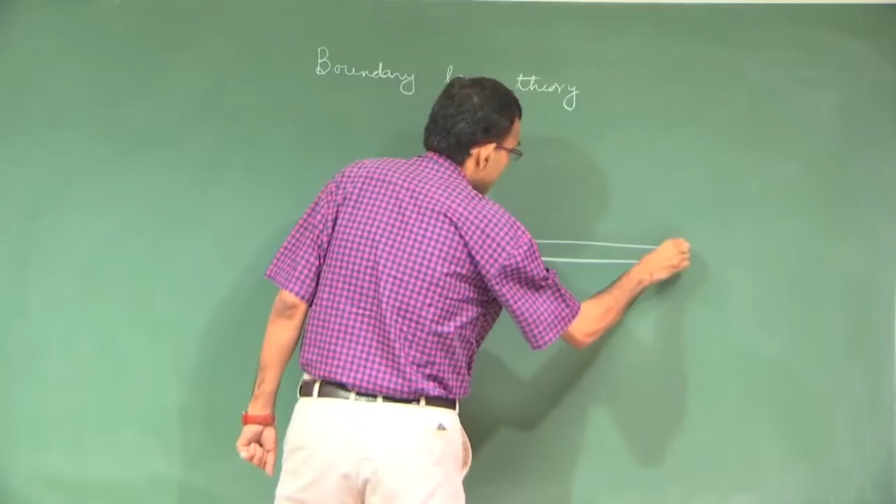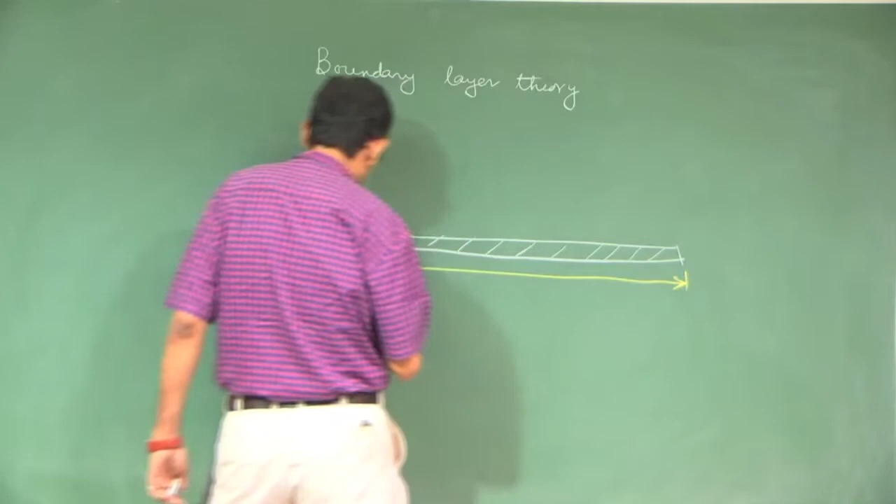Now, before getting into what is boundary layer theory, we have to understand what is boundary layer, and then the theory aspect comes. So, to understand what is boundary layer, let us say that there is a flat plate, infinitely long, and we have just considered a finite length of it. It can be whatever length, let us say L, and fluid is coming from far stream with a velocity u infinity, uniform velocity u infinity.

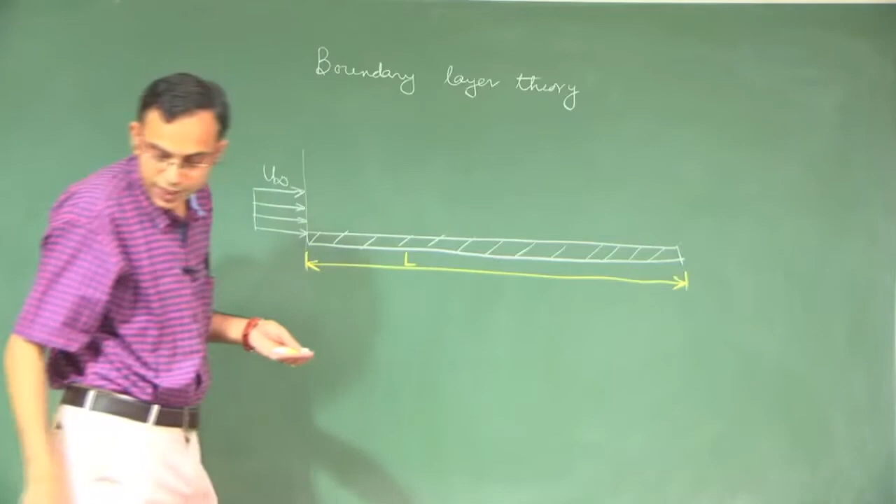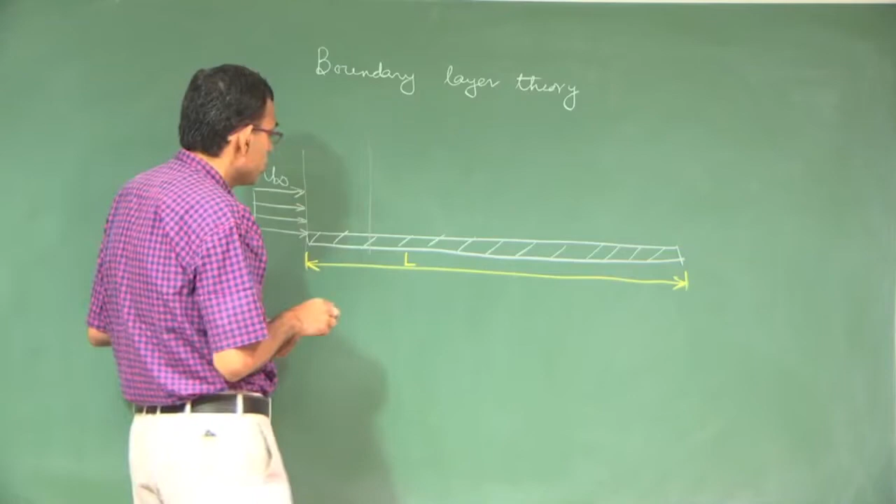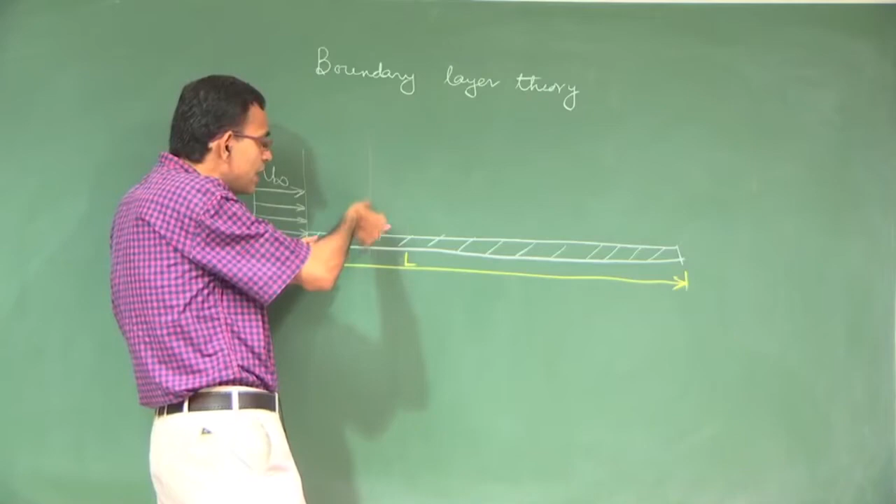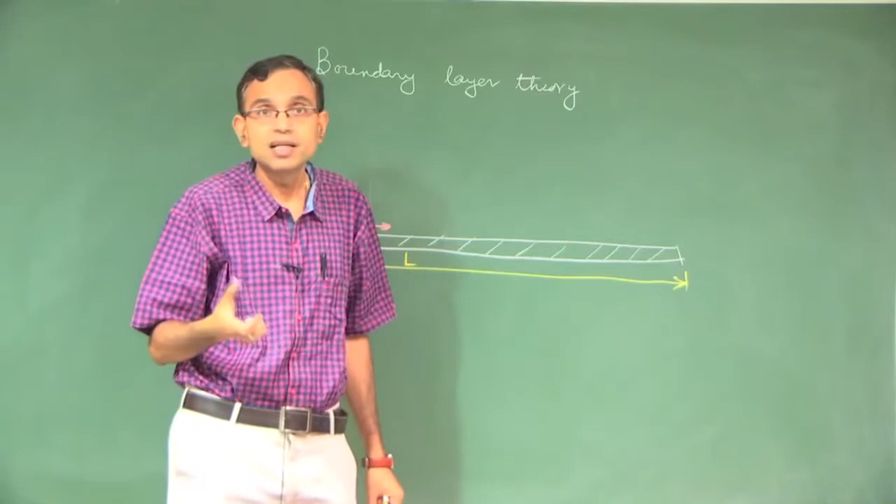In this way, the velocity increases till it comes to u infinity and then the velocity does not change any further. So, this is u infinity, all these are u infinity.

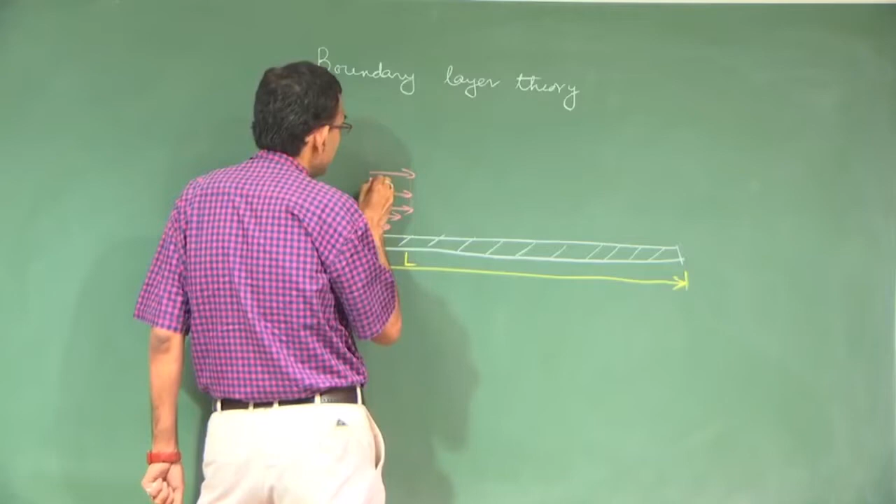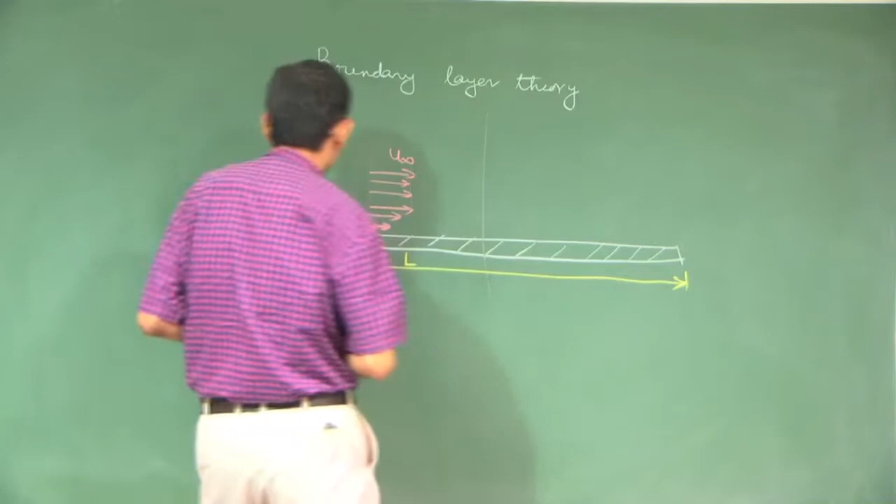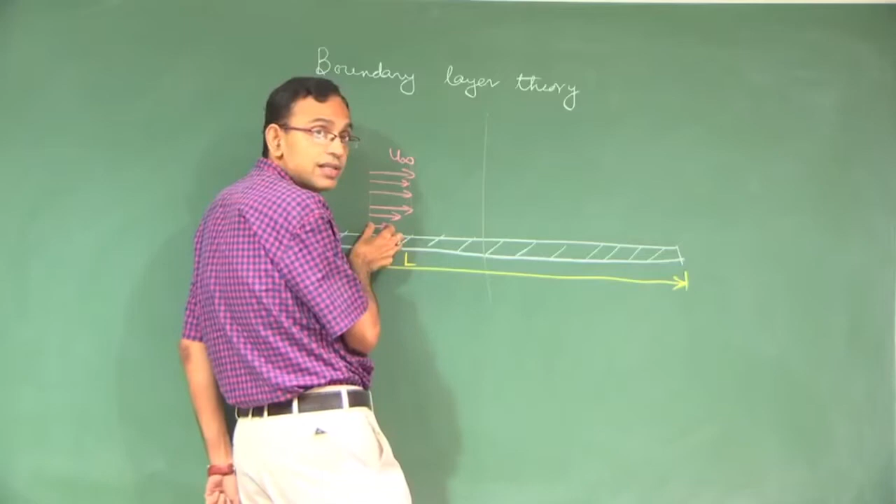Come to another section. So here, at the same layer, whatever is this velocity will be even less. Why? Because more and more fluid is now in contact with the solid boundary. Then the velocity increases and the velocity reaches u infinity not at this height, but let us say some height which is here, or maybe here. This is u infinity and then it remains constant.

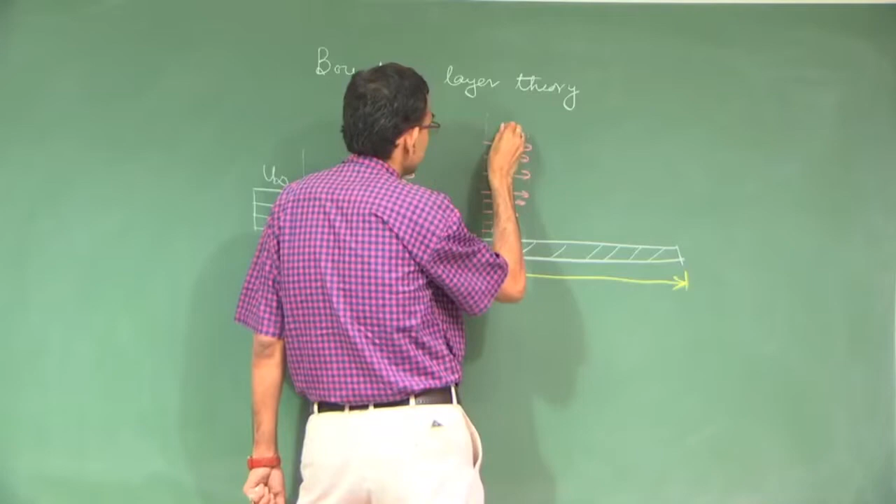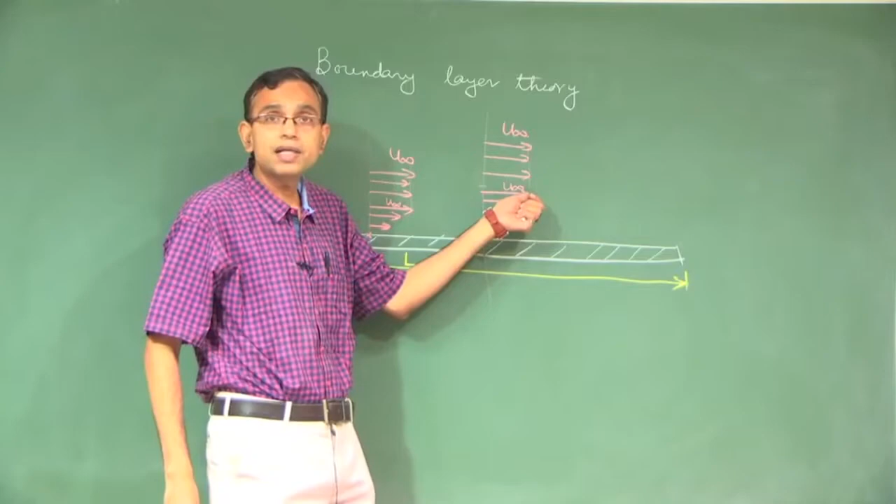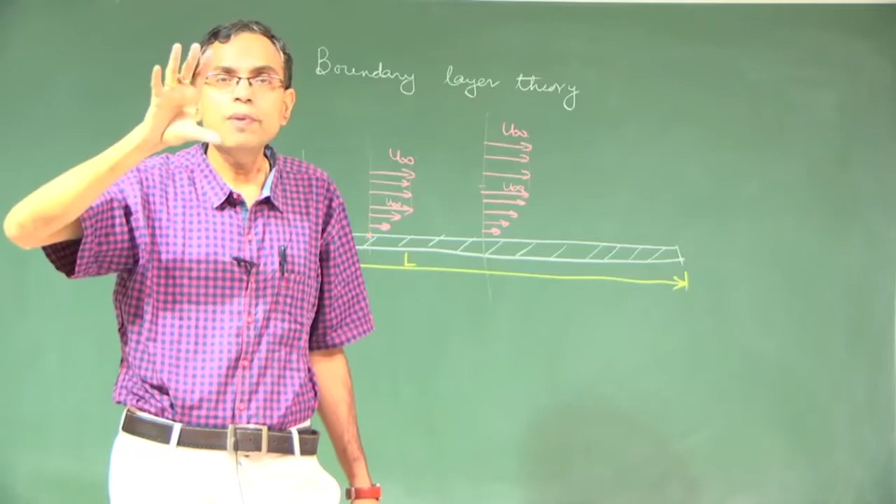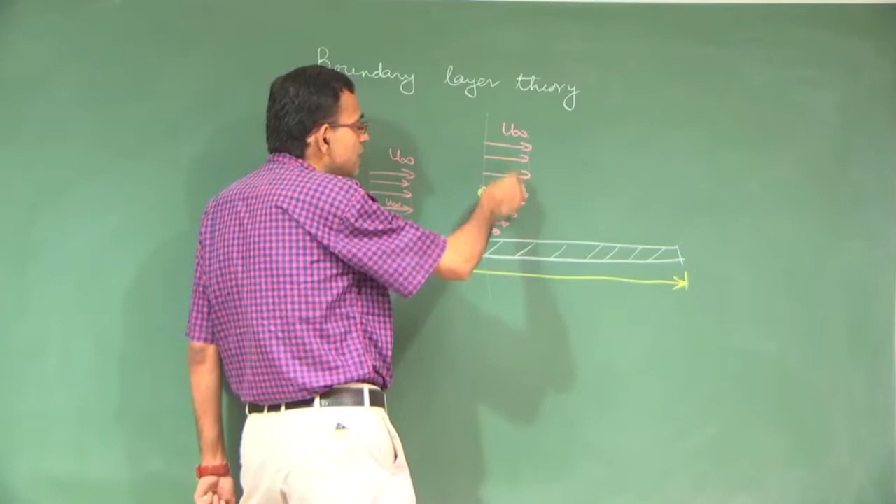When we say it reaches u infinity, remember it is from a practical engineering consideration, because theoretically it reaches u infinity only at infinity. Practically it may reach u infinity within a finite distance, and if it does that, then it simplifies our situation considerably. We will see that later on, but for the time being we are constrained to understand the basics of what is boundary layer. So this circled location is the penetration depth up to which the effect of the plate is felt. Here this is the penetration depth up to which the effect of plate is felt. Outside, because of uniform velocity, the fluid really does not understand that there is a plate.

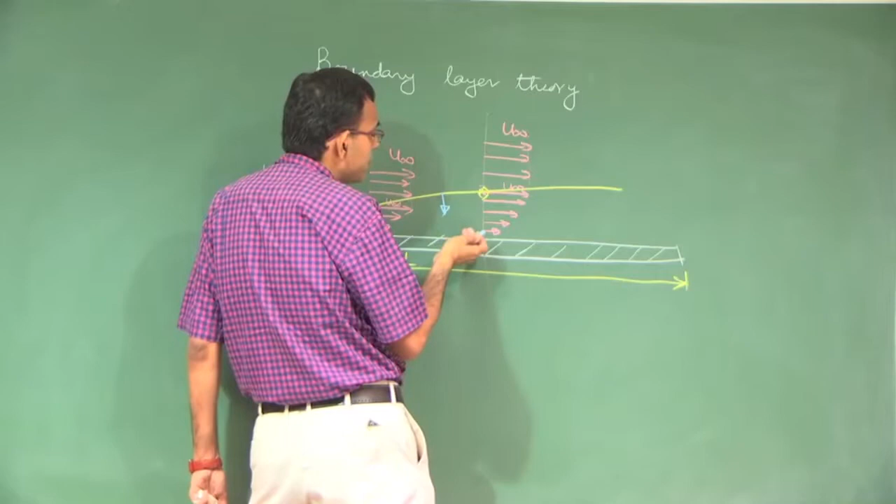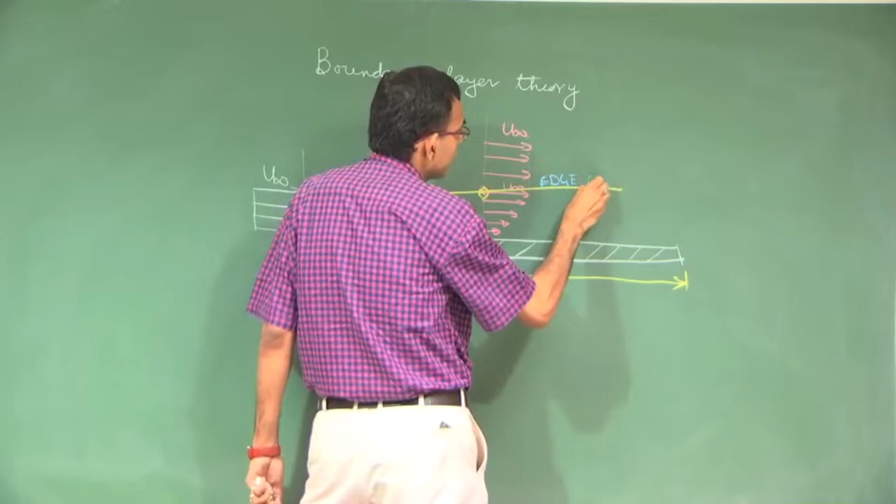So now if we draw the locus of these circled points, then you come up with two regions. This region is a region where the effect of viscosity is important in terms of creating a velocity gradient. So this is called as boundary layer. And this is called as edge of the boundary layer. So in short we will write BL for boundary layer. This is the edge of the boundary layer.

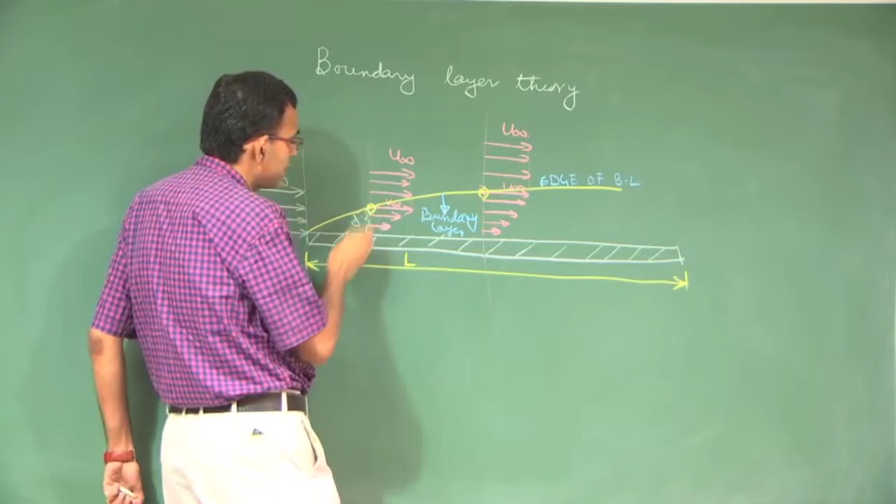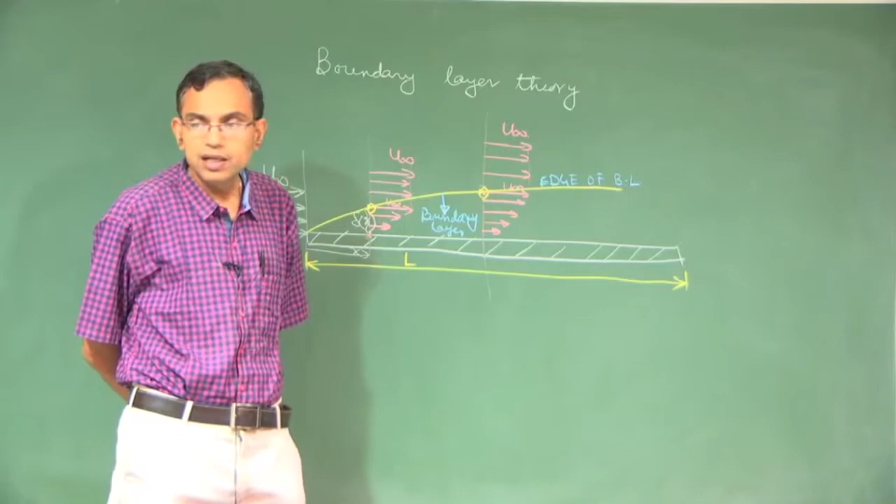Let us say that at some distance x, this delta is a function of x. So the next obvious question will be how large or how small this delta is. There is a possibility that delta is very large. Delta is very large when the fluid is highly viscous. Then up to a large distance from the wall, the effect of viscosity, the effect of momentum disturbance of the wall will be felt.

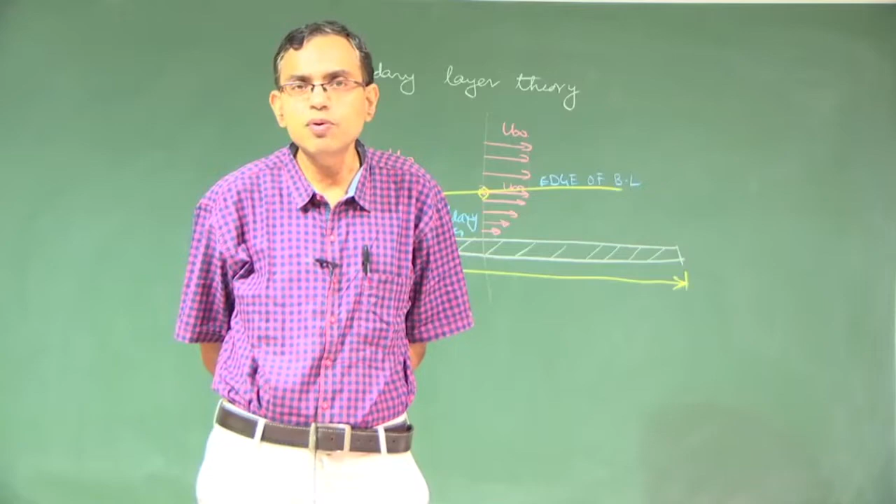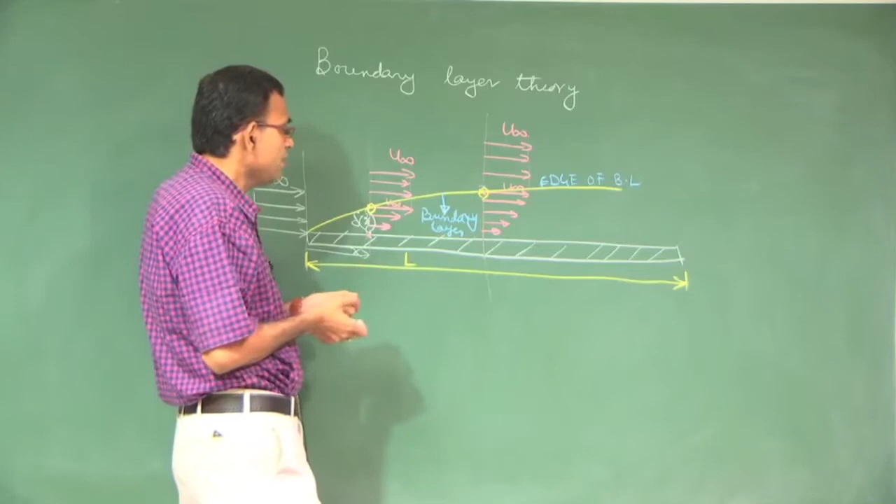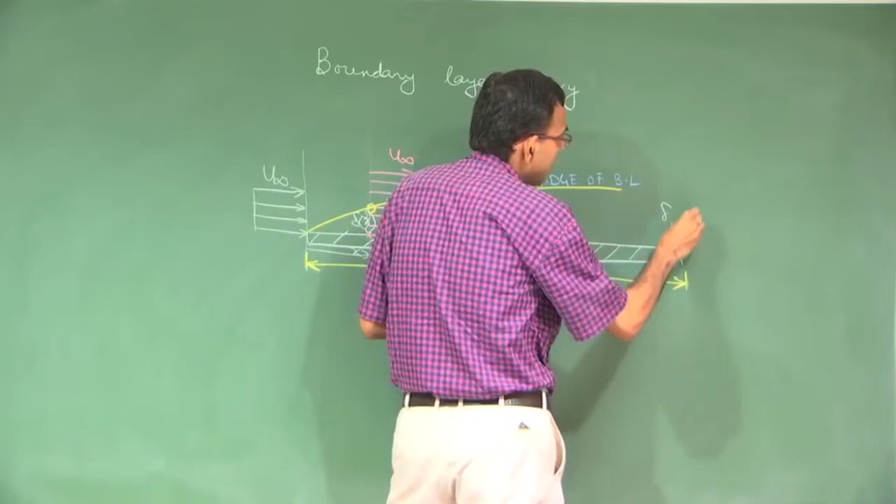However, if the fluid is less viscous, and this is what we are saying qualitatively - quantitatively we will identify some quantitative parameters, because less or more does not have any quantitative meaning. This is just a qualitative way in which we can bring out the physics. So if it is very less viscous, then it may so happen that this layer is very thin - and how thin? Maybe delta at a given length L is much less than L.

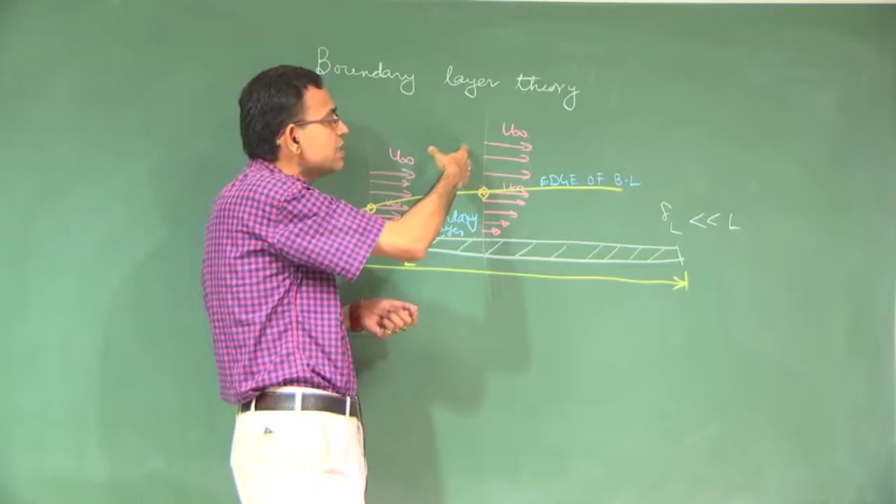If that be the case, then we can develop a nice theory where we can solve simplified versions of the Navier-Stokes equation within this layer, and outside we can use simple potential flow equations or inviscid irrotational flow equations, which for constant density becomes Bernoulli's equation. So the entire domain where ideally Navier-Stokes equation should have been used, gets reduced to a very narrow domain within which viscous flow equations - but Navier-Stokes equation in a simplified form - need to be solved, and outside that equation need not be referred to at all, and inviscid equation can be used.

In the modern era of CFD, you people may argue why is it necessary to get so much restricted, that is have a part of the domain in which viscous flow equation is solved, and a major part of the domain where viscous flow equation is not solved. We can solve blindly the viscous flow equation, full Navier-Stokes equation for the entire domain. We have CFD tools, we have nice CFD software.

Now you have to imagine the era in which this theory was developed. That era was a time when modern day high performance computing was not available. So when it was not available, in those days, because machine was not beating human beings, human intellect was manifested at its best. So human intellect always tried to make an attempt to reduce the computational task by using judicious combination of physics and mathematics, and that was first attempted by the genius of a famous engineer known as Prandtl, and he came up with this revolutionary theory.

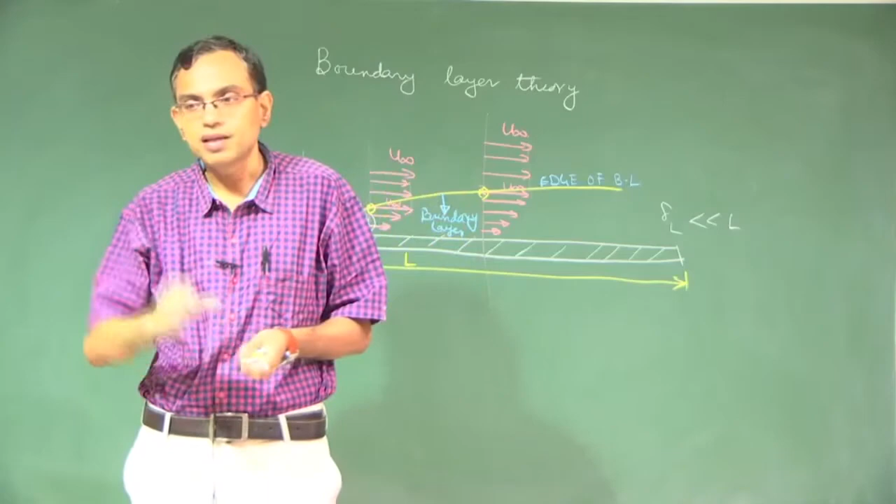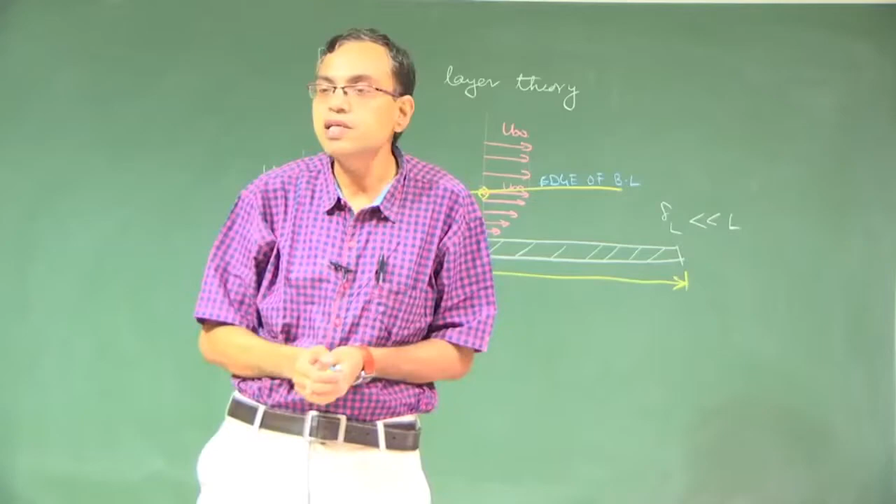Not only that, it gives a nice physical insight to the problem - that how large the domain may be, under certain cases we will identify which cases they are. There is a small part of the domain where viscous effects are important, and a major large part of the domain where you can use the dynamics of inviscid flow equations. The interesting thing is that although the fluid still has viscosity there, it does not have a velocity gradient, and that makes the shear stresses vanish.

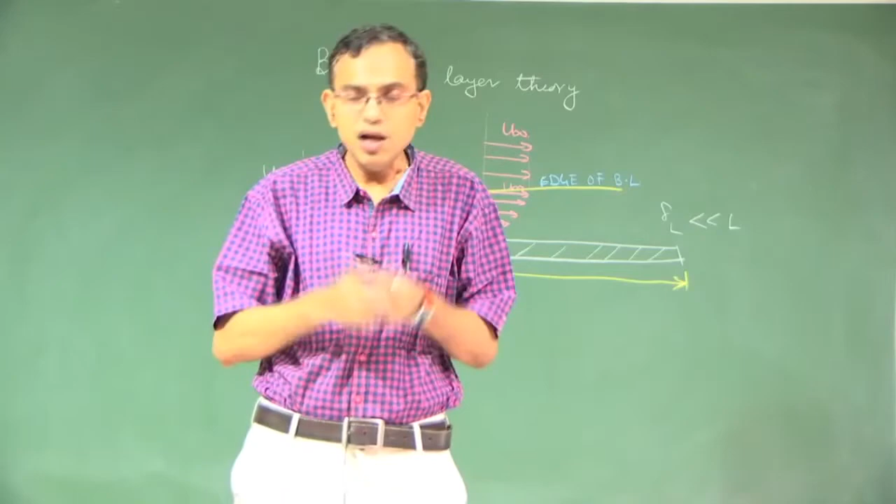So that brings us to the perspective of studying the boundary layer theory. Now you people may have another argument - well, in Prandtl's era maybe CFD or computational fluid dynamics was not that developed, but in the modern era, why do you require to study boundary layer theory? Because we can run CFD codes.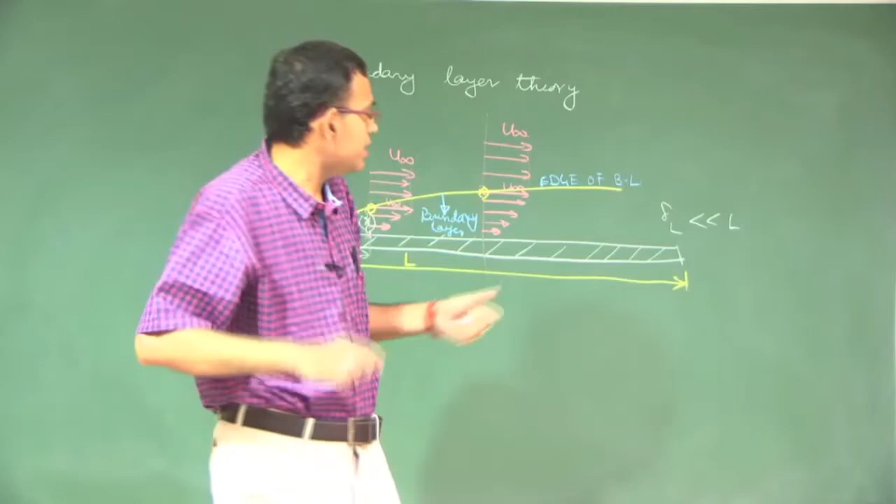Question is, let us say that you have a solid boundary, may not be as simple as a flat plate. Now when you have a solid boundary, to understand the velocity gradients at the solid boundary, you have to use very fine meshing or very fine grid points close to the solid boundary. But in the outer part, outside the boundary layer, such fine meshing may not be required - it will unnecessarily add to the computational cost. So there is always a question of how much distance close to the solid boundary you may have to use a fine grid, and beyond what distance that fine gridding is not necessary.

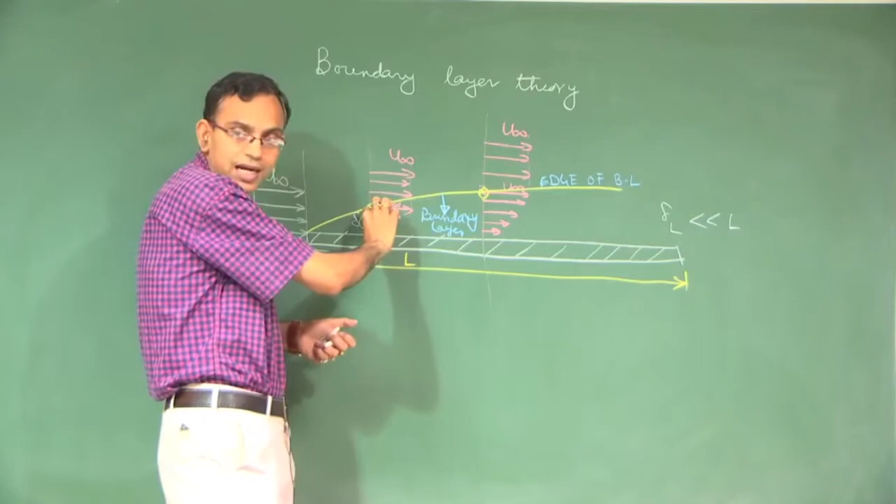How will you know that? You will know that only when you can make an assessment of how thick it is for a given physical problem. Then only you will cluster fine meshes within that, and outside you will not unnecessarily put a huge computational burden by putting large number of grids. So the moral of the story is that even in the modern era of CFD, the physical basis of the boundary layer theory remains as important as it was when it was first introduced.

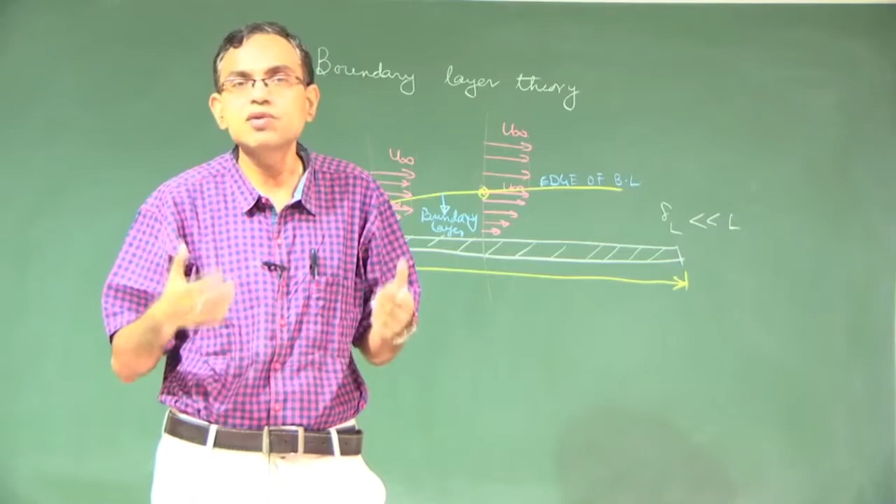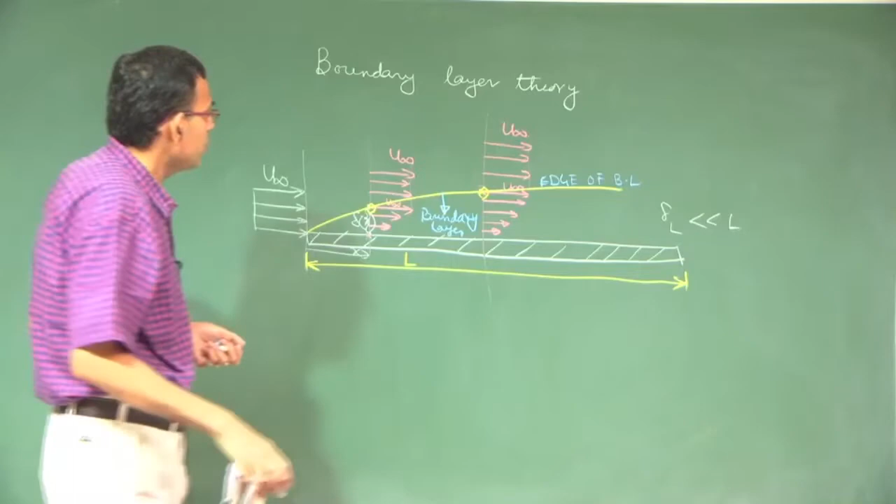So with this little bit of background, what we will do is try to write the Navier-Stokes equation appropriate to this physical consideration.

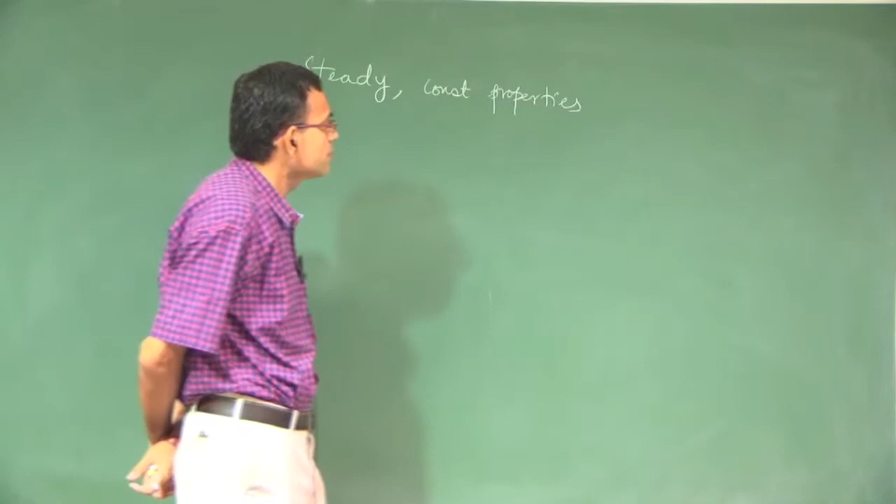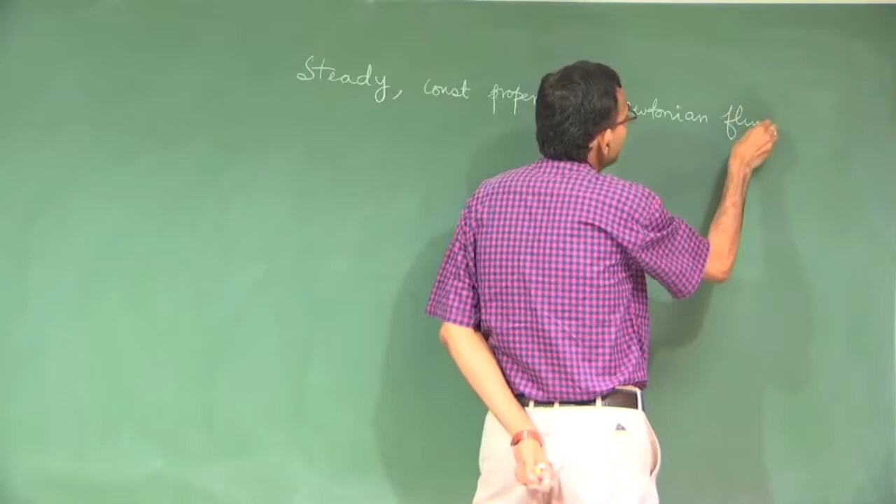So what are the considerations that we will keep in mind? Our assumptions will be steady flow, constant properties, and we will include homogeneous, isotropic, all these things just for the sake of understanding. Then Newtonian fluid, so that by a single viscosity we can describe the constitutive behavior. Then we will also assume that if it is constant property, then density is also constant.

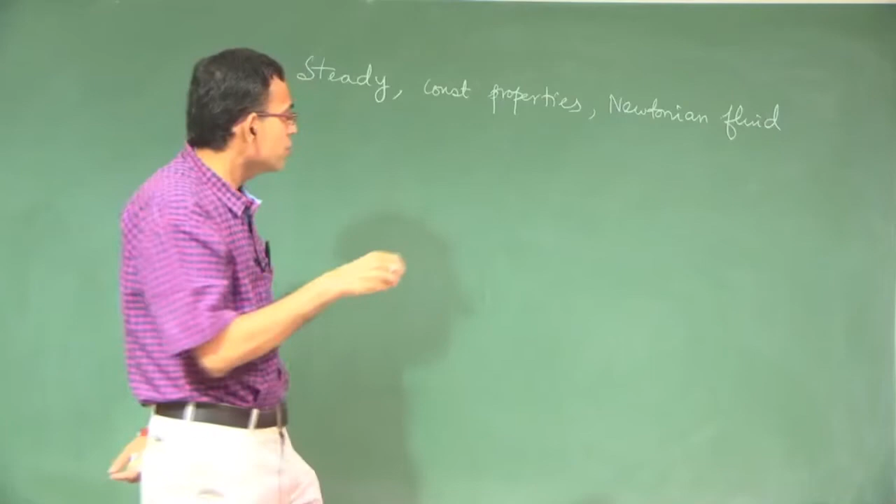So the total derivative of density is 0, that means it will be incompressible flow. And we will assume the 2-dimensional scenario where x coordinate... so if you have a plate like this, x will be along the plate and y will be normal to the plate.

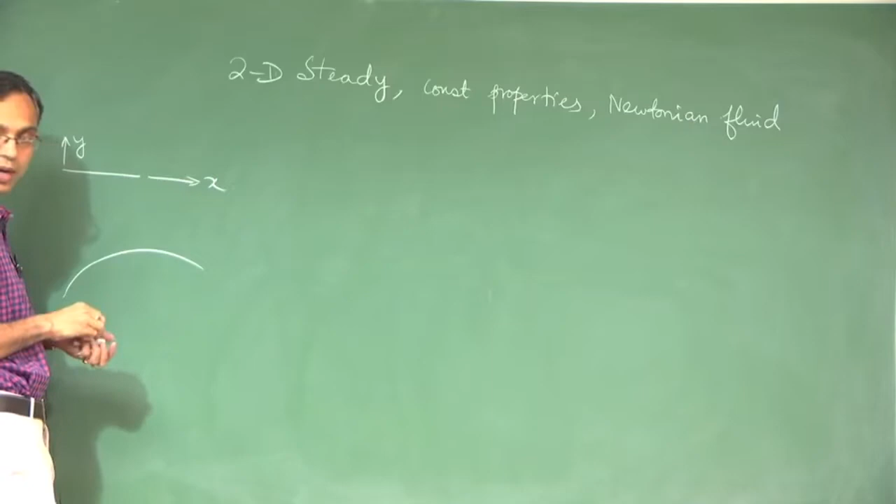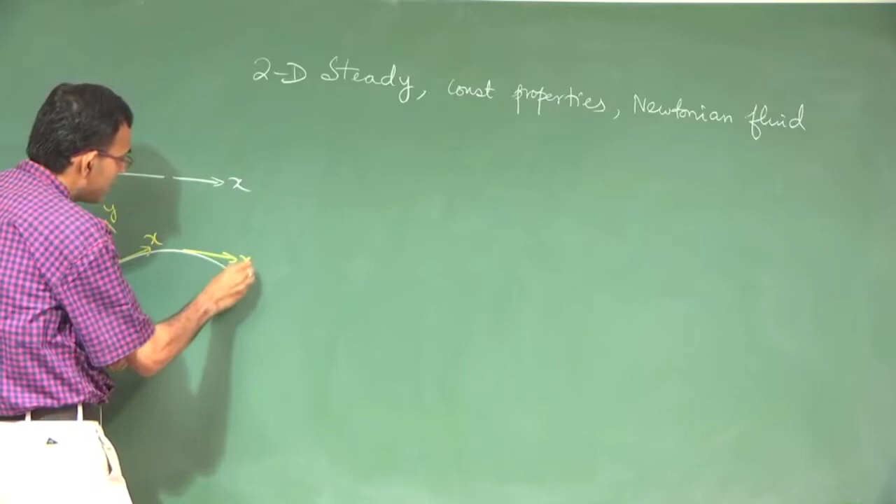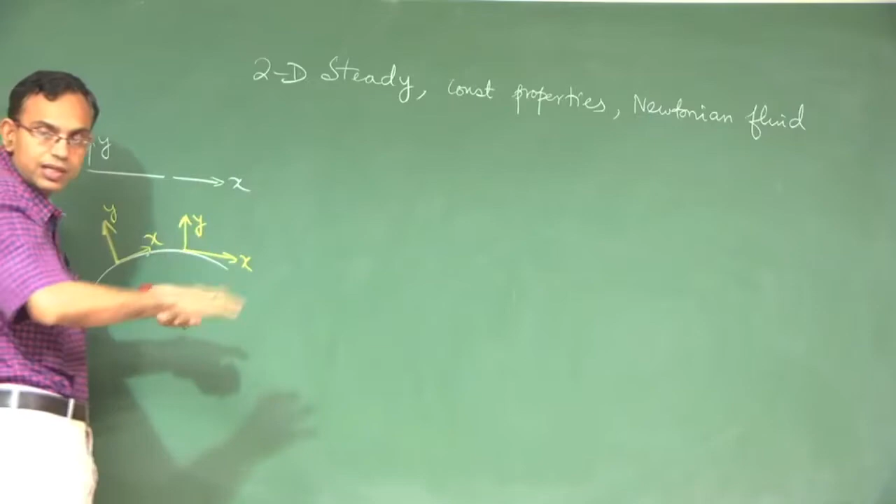Now you may argue that if you have such a case, then what will be your x and y? Still you have a global x and global y? No, in that case we will have a curve-fitted x and y, that means x and y locally here, here x and y like this. So in this way we will have an xy coordinate system where x and y are mutually orthogonal, but their orientations are continuously changing as you are moving along the solid boundary. So with this, but for a flat plate it remains global x and global y.

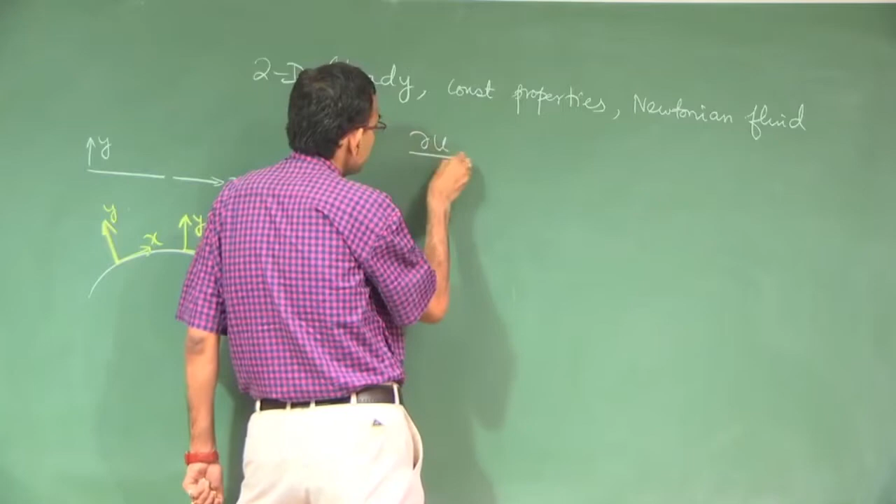So we are writing first the conservation of mass, or incompressibility condition, in this case. So we will make an order of magnitude analysis.

So physically what we are considering, we have a boundary layer like this, at L we have a delta, free stream velocity is u infinity, so we will make an order of magnitude analysis of this equation. In this course so far we have discussed what is order of magnitude analysis and we will apply that here. So this is of the order of u infinity by L, this is of the order of...

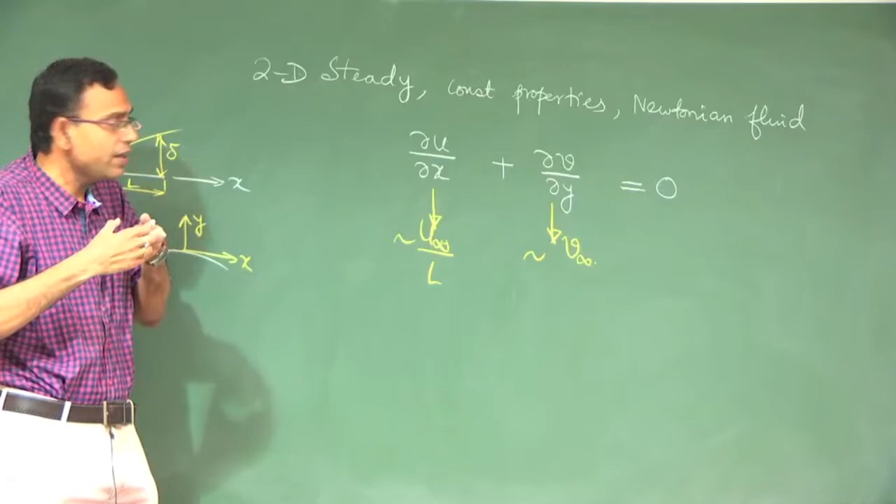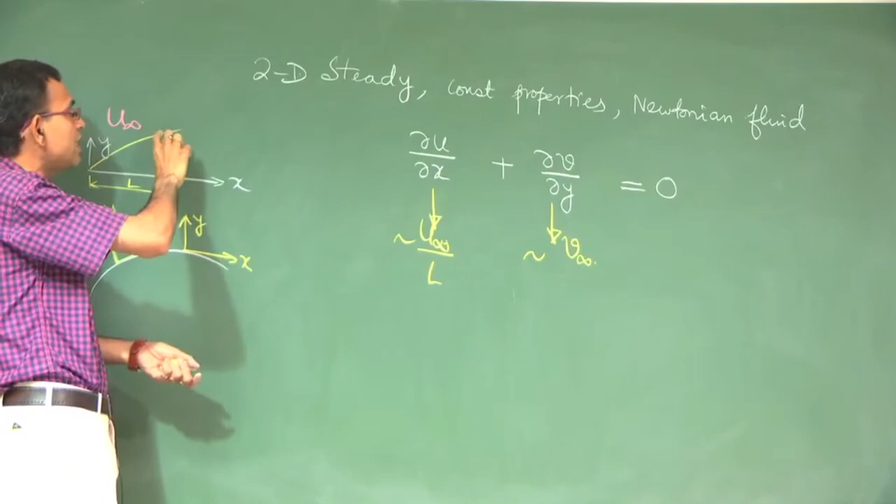Let us say at the edge of the boundary layer V is V infinity. Remember, the transition from the engineering theory to the mathematical theory has to be... so we call it just V infinity, just to give a name. So we have a nice transition from a mathematical based theory to an engineering based theory. When we say mathematical based theory, this delta is technically infinity. Engineering based theory is that if u here becomes 99% of u infinity, for all practical purposes we can assume that that is where the free stream condition is reached.

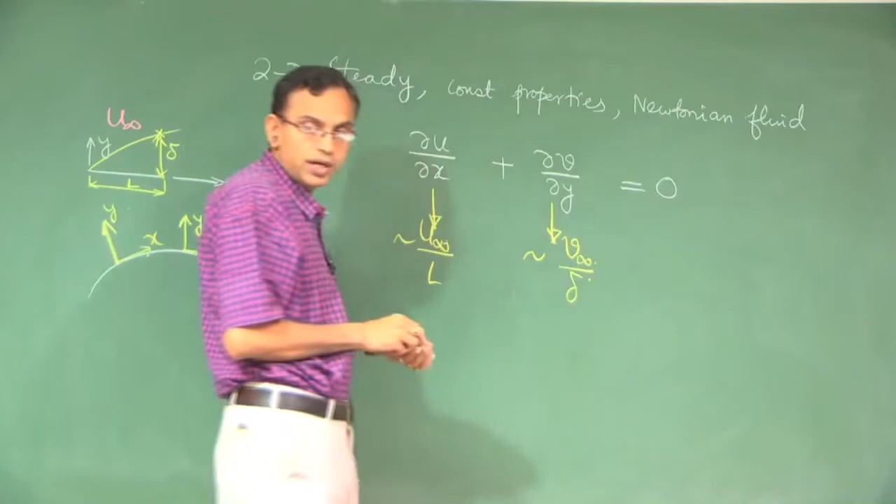So you have a finite boundary layer thickness instead of a mathematically imposed infinite thickness. So this is of the order of V infinity by delta. V infinity is V at the free stream, which is V at delta. So now because these two terms are of the same order, these two terms must cancel each other to make it 0, they must be of the same order. So you can write u infinity by L is of the order of V infinity by delta, that means V infinity is of the order of u infinity delta by L.

So one important thing that we can understand is that V infinity is much less than u infinity if delta is much less than L. But V infinity is never 0, no matter how much less delta is as compared to L. So this is a big distinction between this and the fully developed flow. In fully developed flow, you have V equal to 0. Here V may be small as compared to u, but V is not identically 0.

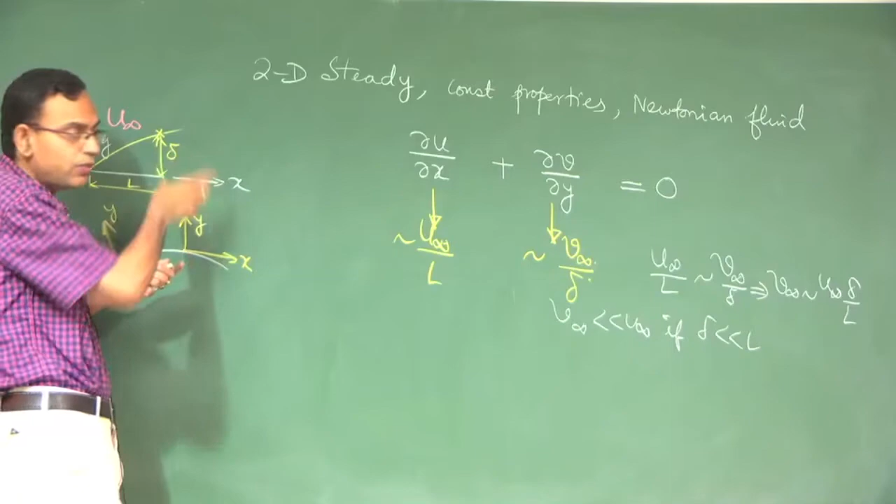Some students have a misunderstanding that V is 0, because when we draw the velocity profile in the boundary layer, we only draw the x component of velocity profile, we do not draw the y component, but y component is very much there. If delta is comparable with L, V infinity and u infinity may be comparable, but in boundary layer theory we are looking only for those conditions where delta is much less than L.

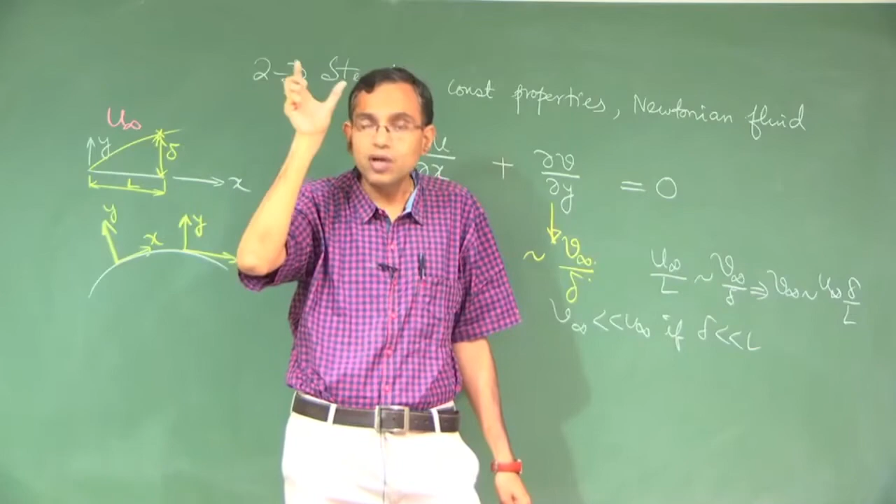So boundary layer will exist for all viscous flow problems. It may be as small to as large as almost the entire up to infinity, but boundary layer theory is a theory which captures only those problems where delta is much less than L. The other part, where boundary layer may be there, but boundary layer theory will not work, so V infinity is much less than u infinity if delta is much less than L.

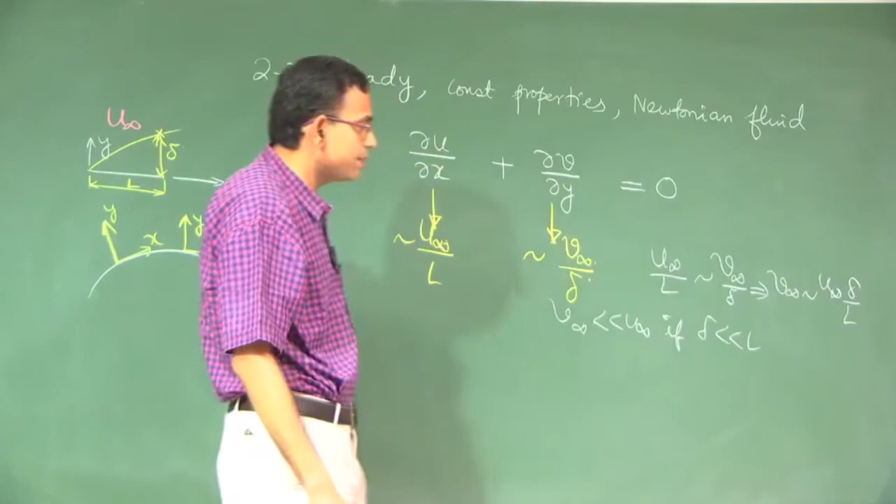Now, we will consider the x momentum and the y momentum.

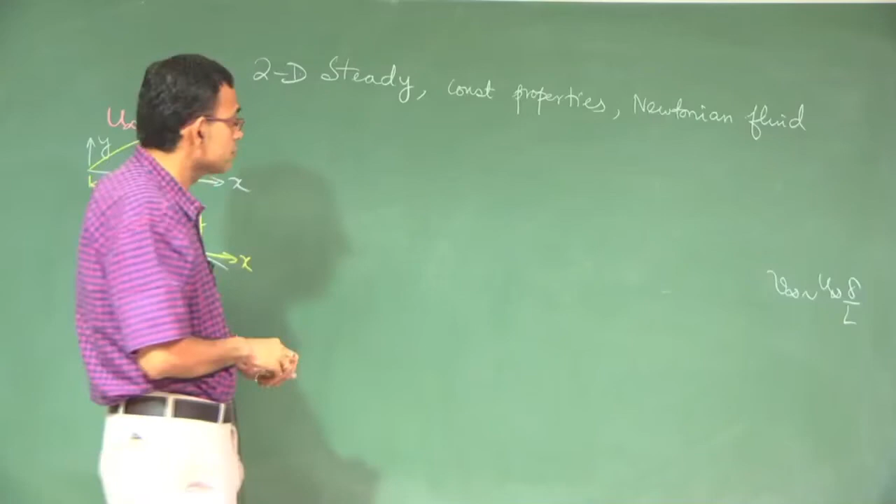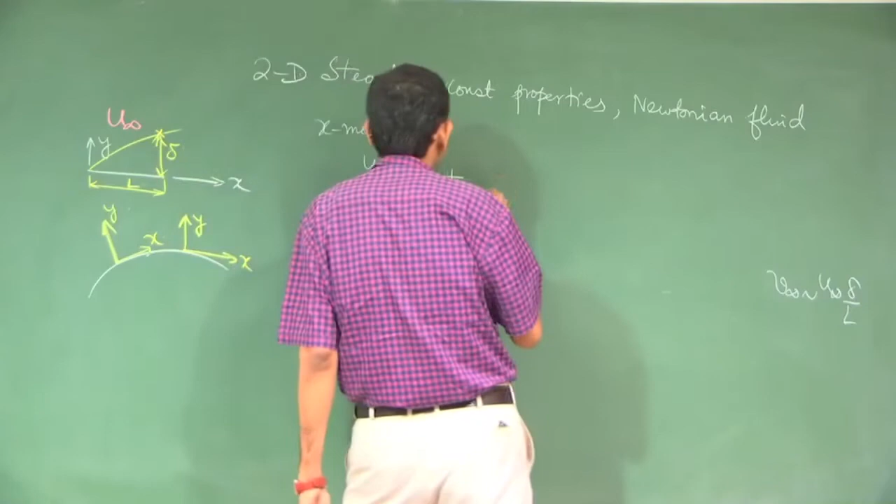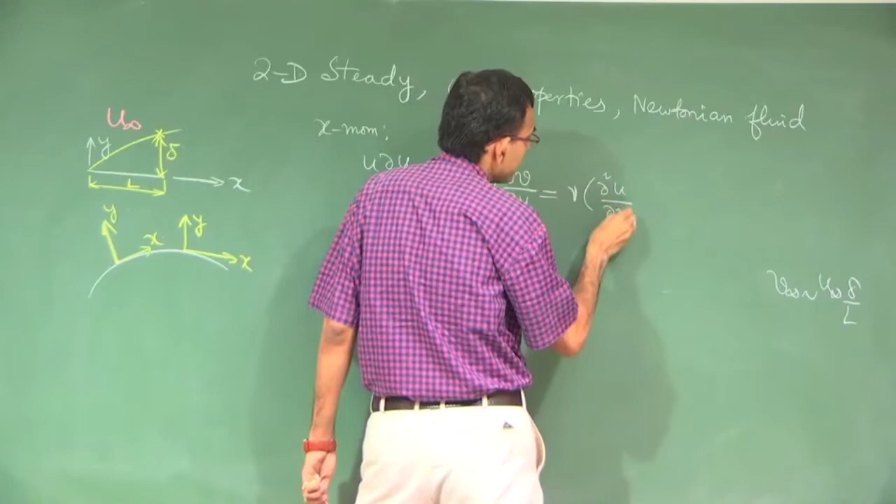Because it is a steady flow, I am just writing the equation straight away. By this time you know how to write the Navier-Stokes equation. Let us assume that there is no body force.

I am deliberately keeping a space here because we will make some order of magnitude analysis, for which I am keeping some space.

So let us find out the orders of magnitude of these terms. This is of the order of u infinity into u infinity by L, u infinity square by L. This is of the order of V infinity into u infinity by delta, but from here you can see that v infinity is of the order of u infinity delta by L. So this becomes of the order of again u infinity square by L.

See, this is again something which is not intuitive. The reason is, before that I think the pressure gradient term we have missed. So let us just write this to complete the equation.

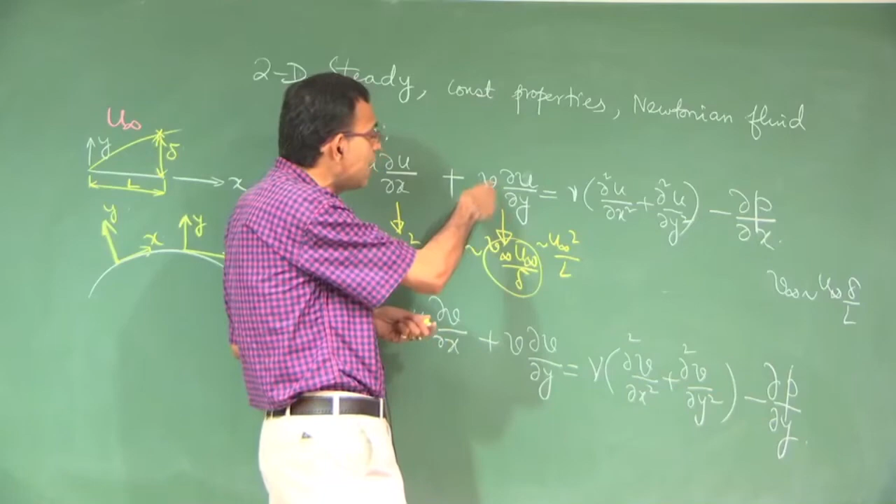So coming back to this, this term and this term are of the same order as we are seeing from here. Natural intuition is that because here is V and V is much less than u, if delta is much less than L, this term is much less than this. That is not true. Why that is not true is because this gradient is much sharper than this gradient. So this term is exactly as important as this term. If you cannot ignore this term, you cannot ignore this term.

Out of these two terms, this is of the order of, and this is of the order of, if delta is much less than L, then this you can neglect clearly. Pressure gradient we are not committing at this moment how big or how small it is.

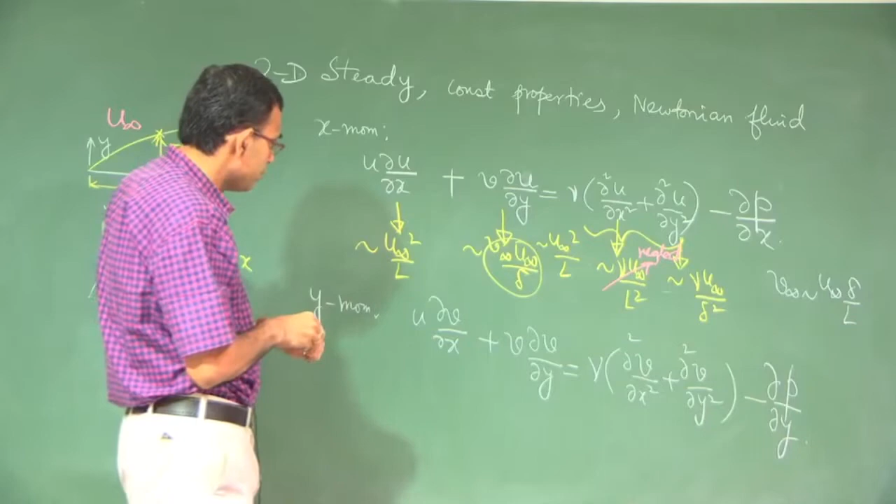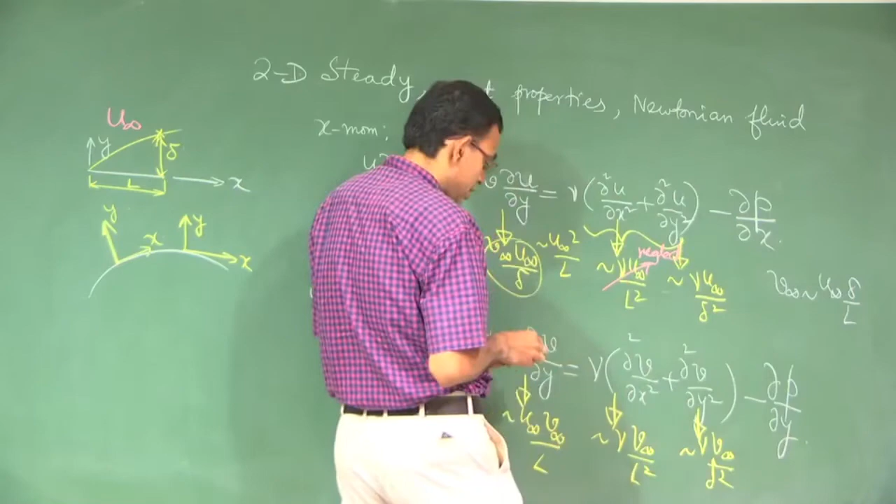So here also in the same way we will write the order of magnitude, this is U infinity V infinity by L. Using the continuity equation, this will also become of the order of U infinity V infinity by L. This is of the order of nu V infinity by L square, this is of the order of nu V infinity by delta square. Again this can be neglected.

All these are based on the premise that delta is much less than L, the entire understanding is based on that. So now let us write the inertia term.

This is the left hand side in y momentum by inertia term in x momentum. This is of the order of u infinity V infinity by L, divided by u infinity square by L, right. So u infinity gets cancelled, V infinity by u infinity, that is of the order of delta by L. So this is much less than 1 if delta is much less than L.

Similarly, viscous term in y momentum by viscous term in x momentum is of the order of V infinity by u infinity, you can clearly see this term and this term. So that is also the same conclusion that can be drawn from that.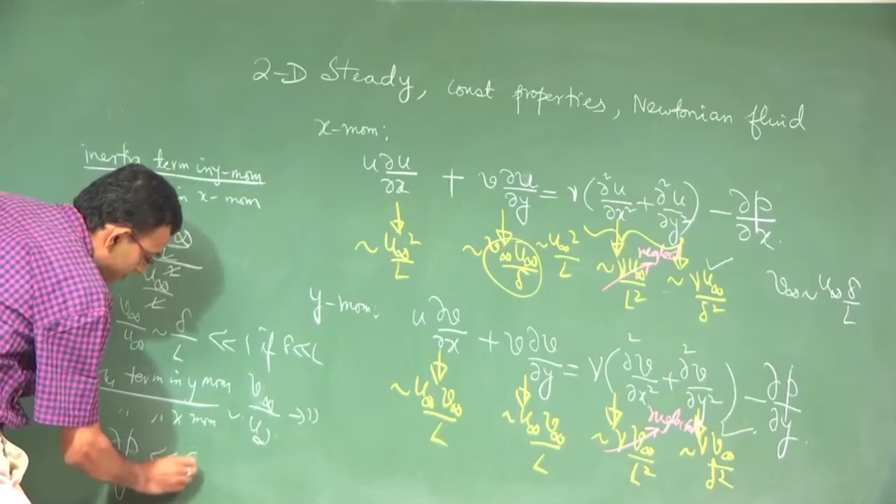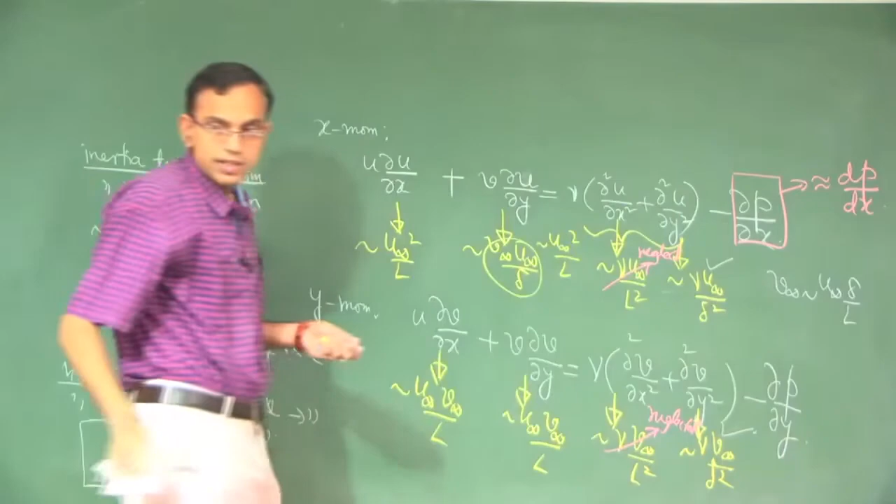This is the conclusion from the analysis of the y momentum equation. That being the case, you can write p as a function of x only. So this will approximately become dp dx. This leads us to the boundary layer equations, from the Navier-Stokes equation to a simplified Navier-Stokes equation within the boundary layer, which are called the boundary layer equations.

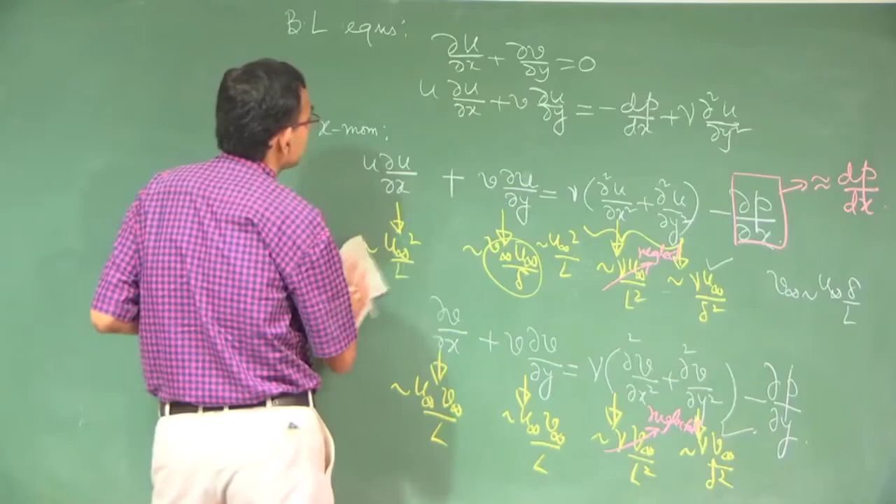Okay, so now when you have these boundary layer equations, the question is when are these equations valid? To understand this, we will take the example of flow over a flat plate. Of course, we have taken the consideration that delta is much less than L.

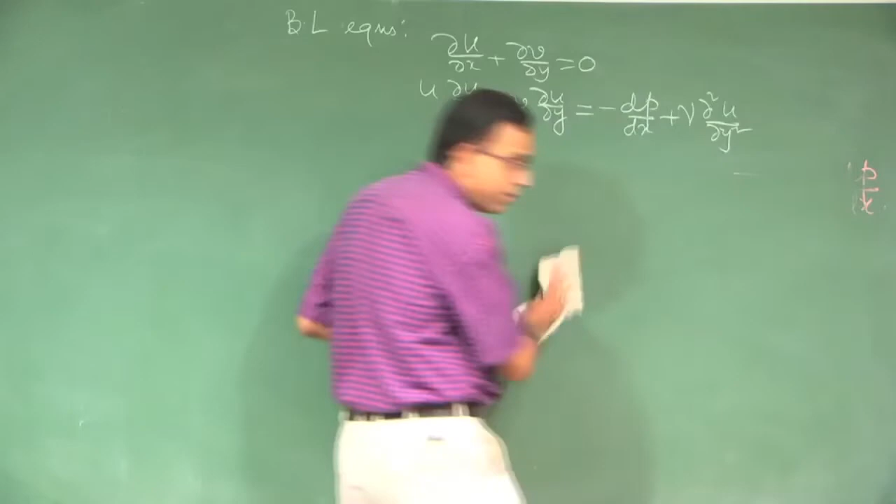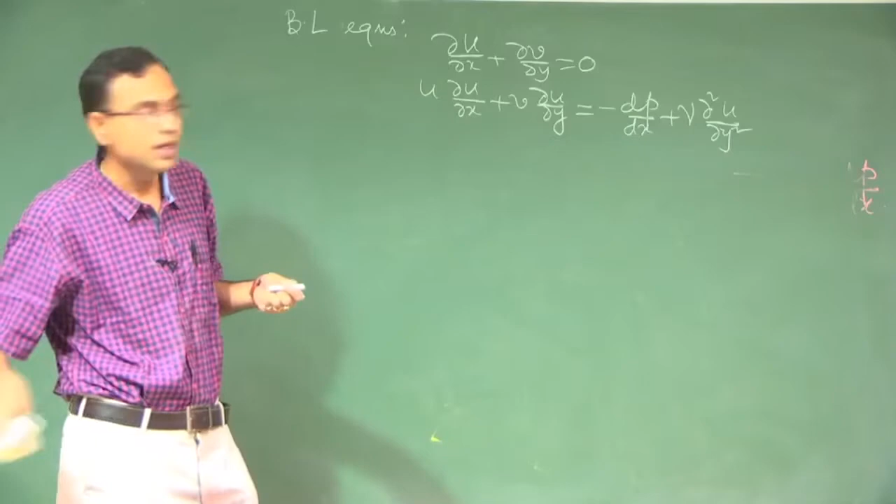But a physical problem where some external condition is imposed does not understand what is delta, right. So we need to express this in terms of externally controllable physical parameters. So, example, flow over a flat plate.

Because there is no pressure gradient across the boundary layer, you can write dp dx is equal to dp infinity dx, right. The pressure gradient along x is whatever is imposed from outside the boundary layer, and outside the boundary layer the beauty is that you can use this Bernoulli's equation if rho is constant.

The reason is that the uniform flow is irrotational, outside the boundary layer is inviscid. Inviscid flow means irrotational flow will remain irrotational forever. So you can use Bernoulli's equation with an absolute global constant. So if that be the case, you can then differentiate this with respect to x,

because u infinity does not change with x. If u infinity does not change with x, and that is the case for flow over a flat plate, you have dp infinity dx equal to 0. So if dp infinity dx equal to 0, then you have

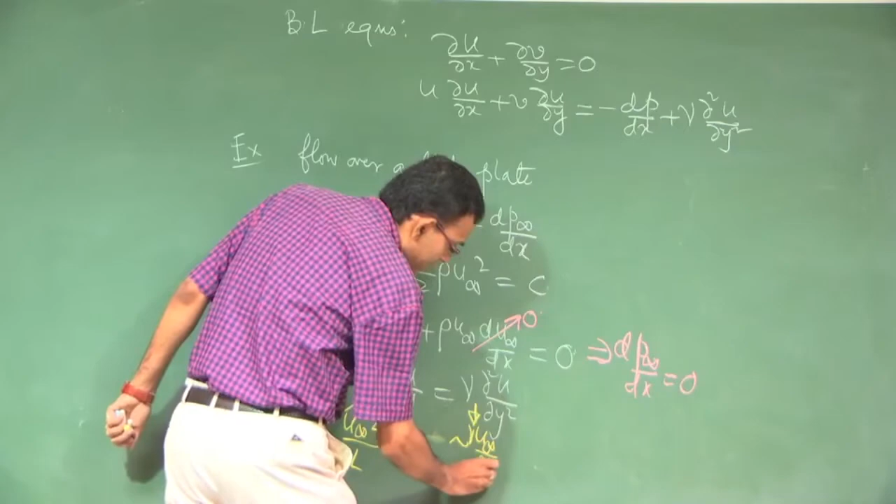this one. So when you have this one, this is of the order of u infinity square by L, and this is of the order of nu u infinity by delta square. So these two terms are of the same order.

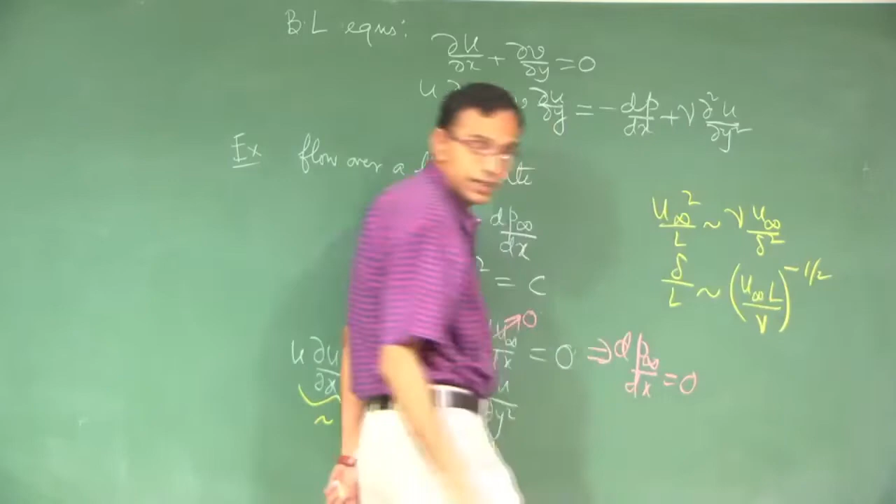So u infinity square by L is of the order of nu u infinity by delta square. So delta by L is of the order of u infinity L by nu to the power minus half, right. So this means delta by L is of the order of Reynolds number to the power minus half.

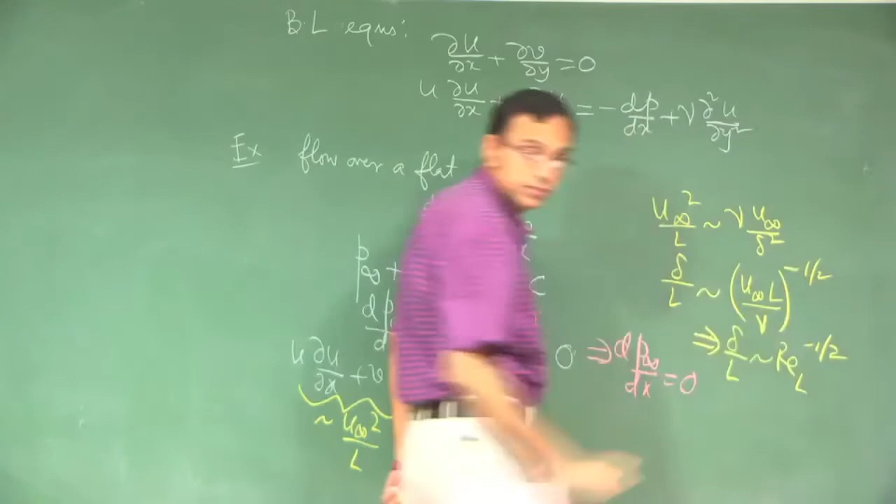So from here you have a clue. Now this is an externally controllable parameter. So you are able to say that delta is much less than L only when Reynolds number is large. So boundary layer theory is applicable to large Reynolds number problems, because when you have Reynolds number large, how large?

This Reynolds number such that delta is at least 1 order less than L, that is delta by L at least 0.1 or less. So then you can find out a Reynolds number, and for that Reynolds number or beyond that you can use the boundary layer theory. So delta much less than L will boil down to Reynolds number very large.

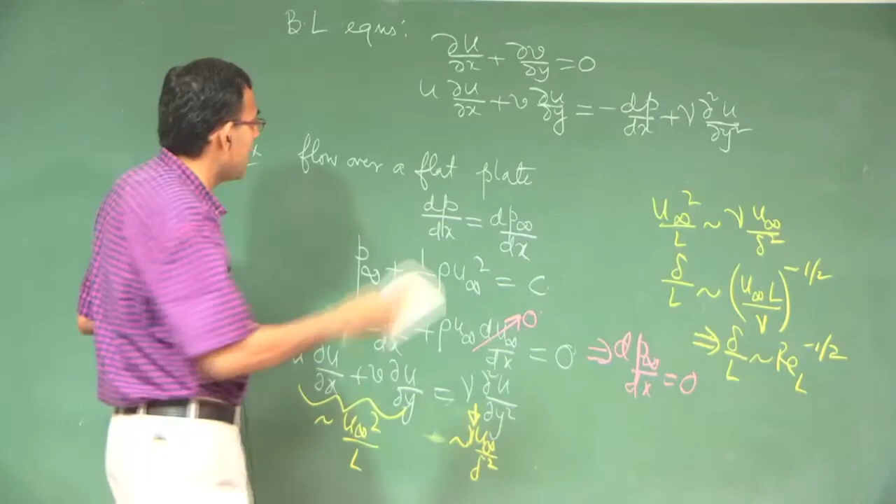So boundary layer theory is applicable when delta by L is much less than 1, which is equivalent to Reynolds number large, and see another case which for flow over a flat plate is not encountered, but for other cases you have this dp dx, and this dp dx can play a very critical role.

For example, if the dp dx is such that there is an adverse pressure gradient. Adverse pressure gradient means pressure is increasing along x. If pressure increases along x, then there will be a force which is opposite to the motion of the fluid. The fluid wants to move along positive x, but the pressure gradient is called adverse because it is trying to oppose the movement.

Along with that, the viscous force also tries to slow the fluid down. So the acceleration or the inertia of the fluid may not be sufficient to overcome these two forces, and if it is insufficient, the fluid instead of moving forward may start to move backwards along the negative x direction, and this is called boundary layer separation.

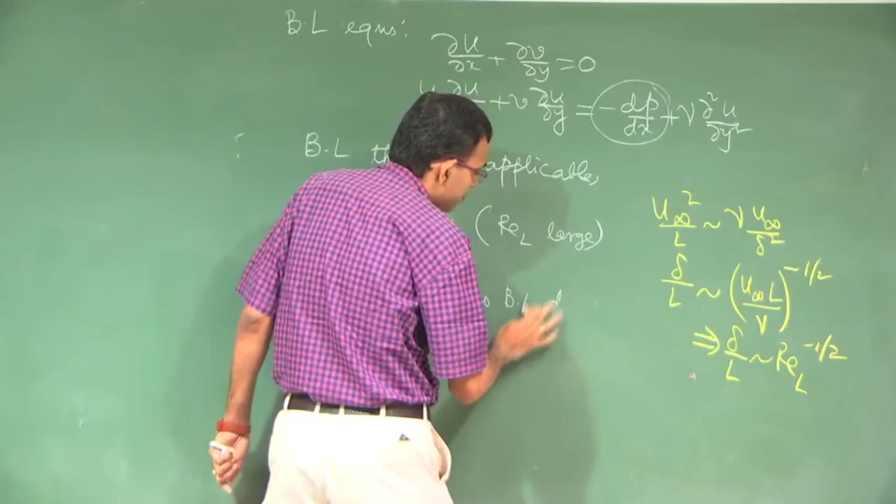If there is adverse pressure gradient, then there is a chance that boundary layer separation occurs, and if boundary layer separation occurs, then there is no more monotonic growth of delta as a function of x, and then we say that boundary layer theory does not work. So boundary layer theory is applicable when delta by L is much less than 1 and there is no boundary layer separation. This is not very commonly discussed, but this is very important.

For flow over a flat plate this does not matter, because there is no question of adverse pressure gradient, the pressure gradient is 0. So there is no question of boundary layer separation.

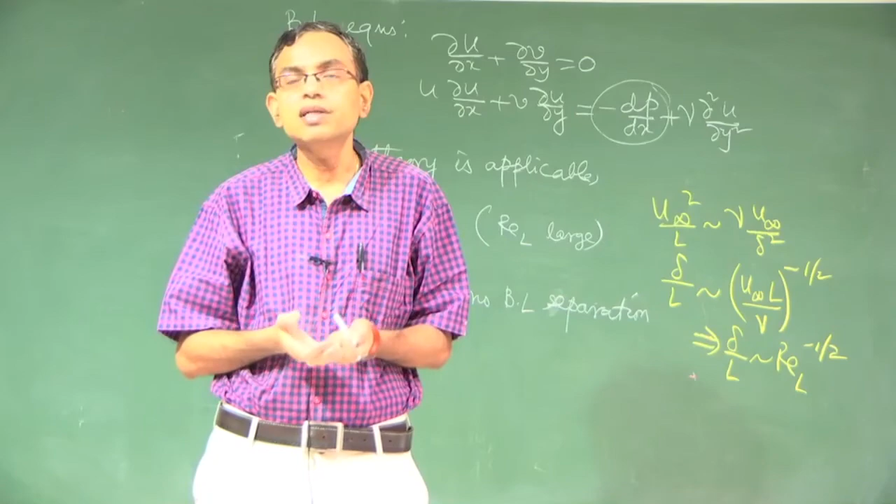So today we have learnt what is boundary layer theory, what are boundary layer equations, why it is important, and what are the assumptions behind boundary layer theory. We will take it forward from this in the next lecture. Thank you.